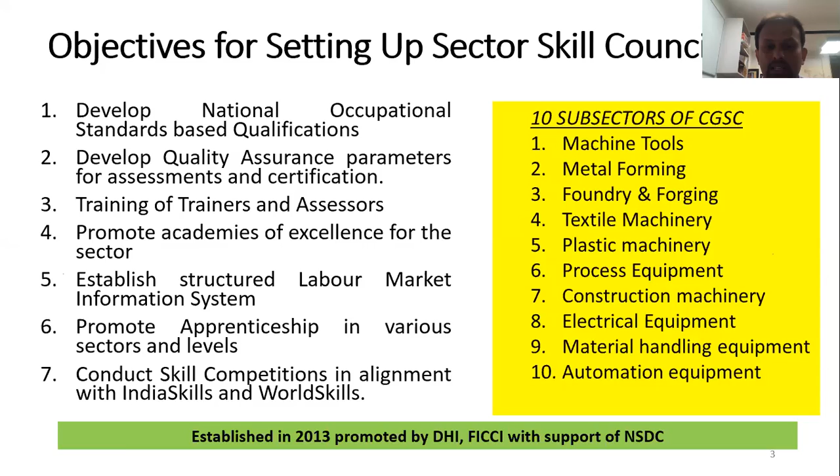CGSC so far has affiliated approximately 896 training centers pan India. We have developed 55 qualification packs and 96 unique national occupational standards. And at the moment, understanding that Industry 4.0 is going to be the need of the hour, 2 qualification packs for Industry 4.0 are already under industry validation.

We have tied up with many academic universities and colleges. We have also done state partnerships, MOUs with some very good states. We have designated 15 TOT centers and 10 designated centers of excellence. As far as training is concerned, we have got more than 1 lakh trainees assessed and certified. We have also certified more than 800 trainers and more than 463 assessors as on date.

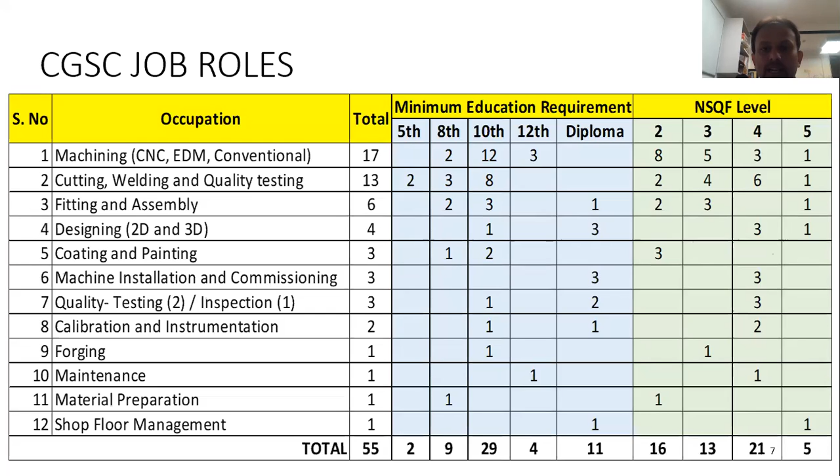Capital Goods Skill Council job roles are primarily in the occupations of machining, cutting, welding, quality testing, fitting, assembly, designing, whether it is 2D or 3D, coating, painting, machine installation and commissioning, quality testing plus inspection, calibration, instrumentation, forging, maintenance, material preparation, and shop floor management. In total, we have developed 55 qualification packs, and all these qualification packs have been developed keeping in view the industry's perspective, what exactly the industry's need is right now.

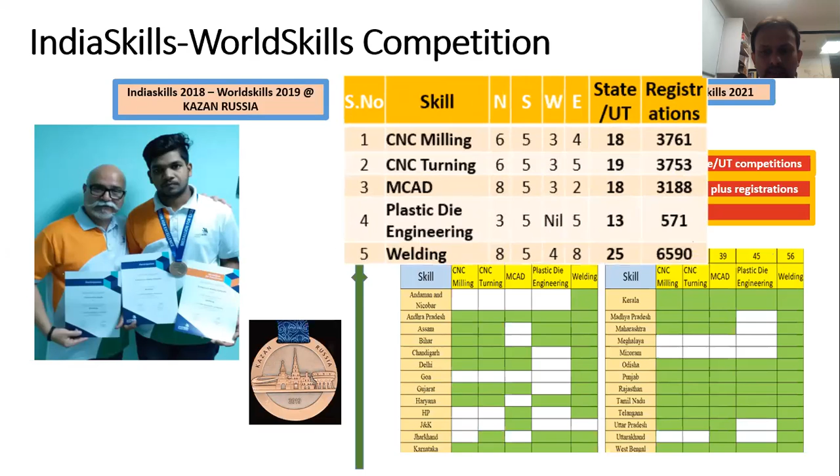We are also promoting apprenticeship, and the good thing about apprenticeship is that now no labor inspector is required to take care of the apprenticeship guidelines, because the CGSC CEO has been designated as a joint apprenticeship advisor for the office. We have created so far 4,945 opportunities and 1,052 contracts have been generated.

So in case your company is looking to hire apprentices under mechanical job roles, we request you to kindly get in touch with us. We will definitely help you in the hiring of apprentices.

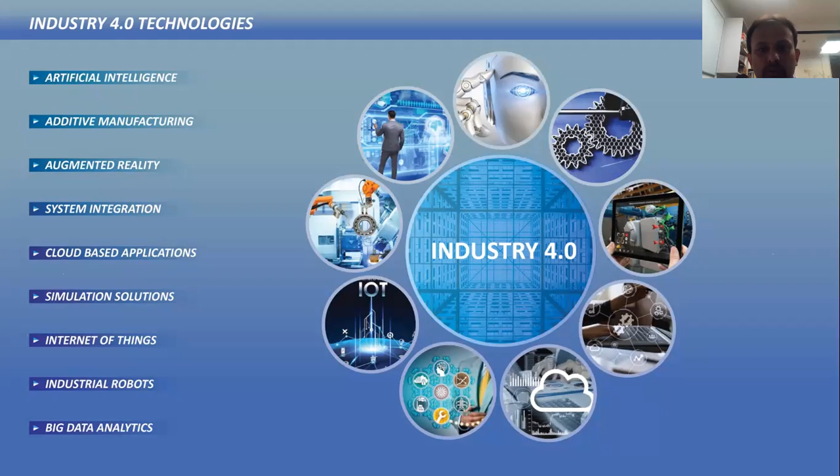These are a few of the job roles for the future, like factory automation engineer, smart mechatronics engineer, digital quality engineer. These are a few of the job roles which may be required in the coming stages by the industries.

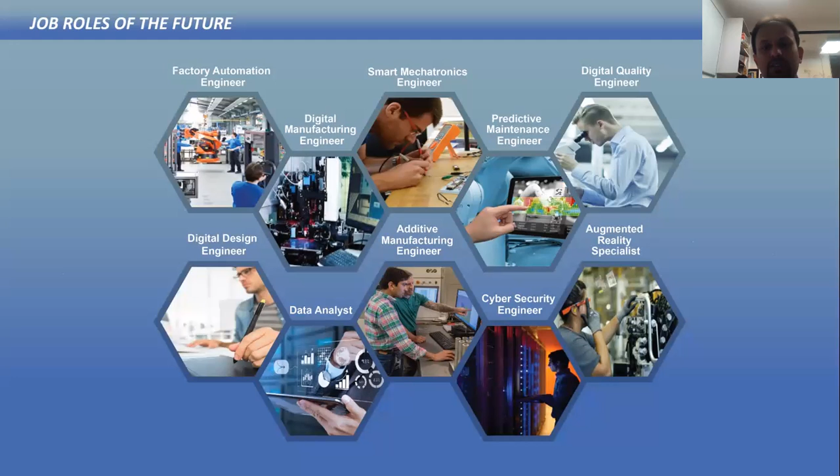Atmanirbhar skilled employer mapping. This is a portal which has recently been introduced by NSDC in association with sector skill councils. So the main objective of developing this particular portal is to bridge the demand and supply gap. So recently when the COVID was there, many of the industries have actually approached us and requested that, see, we are looking forward if you can please help us in hiring some good quality workforce.

So keeping this in view, the government has recently launched this particular portal, and Capital Goods Skill Council is also in a process of development of its own placement portal for the member companies, where the member companies can easily post their job requirements, and we will help them in getting the right quality certified workforce for their company.

As far as industry is concerned, we can support in providing the workforce. As I have already mentioned, we are also into upskilling and reskilling of existing employees through RPL and certify existing workforce through CGSC. We also provide an opportunity to explore industry-owned training centers and adopt existing centers under CSR initiatives. Knowledge support is always required from industry experts to run relevant need-based skill courses and be a member of CGSC.

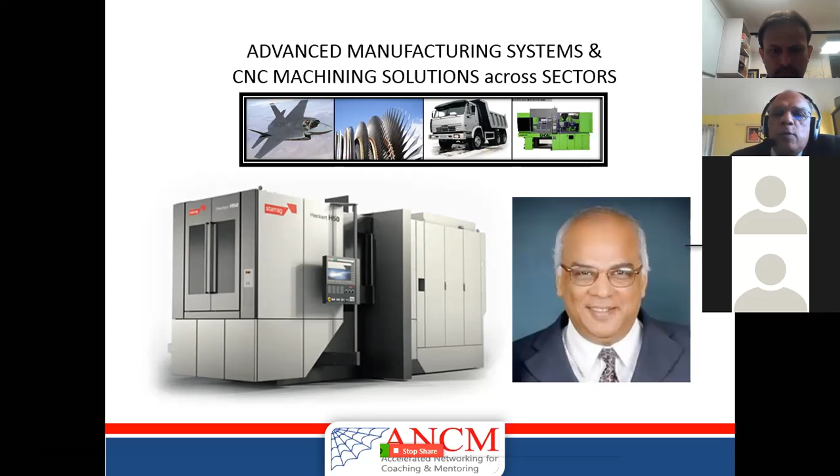Machine tools are used in several markets: typically aerospace sector, energy sector, power generation, industrial sector which includes machine tools, valves and so on and so forth, general engineering - industrial sector is nothing but general engineering - and transport sector. Transport sector means not only cars, it is 2-wheelers, 4-wheelers, which means passenger car, trucks, tractors.

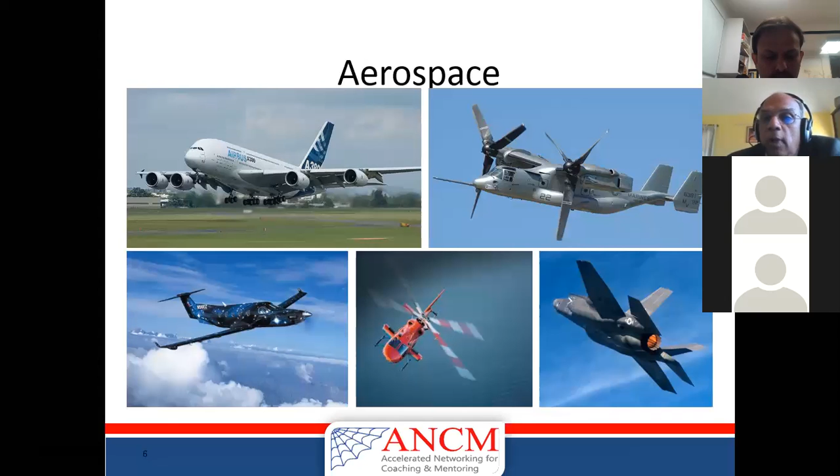Typical examples, I already told you. Transport could be tractors, trucks, even marine ships come under transport, and railway. Aerospace could be helicopters, drones, not only aircrafts - aircrafts could be civilian or military. Energy sector: power generation, turbines, windmills.

Now, the reason I want to go through this is the machining solutions. The word 'solution' is very important - we are not talking about a machine tool, engineering, design of machine tool and all, we are talking about solutions. That means the customer should be able to appreciate the requirement of the machine tool. The buyer of the machine is the one who is looking at the application of the machine and how the metal cutting happens. Today I am focusing on metal cutting machine tool.

Capital Goods Skill Council will invite experts from other sectors as we go along. We will get experts from metal forming machine tool, plastic injection machine tools, textile machinery, and so on and so forth. But today's focus is metal cutting machine tool.

The application of the customer for the component, whether it belongs to transport, power generation, aerospace, or industrial, is very important for us to understand. Then we can select the right machine for the right component.

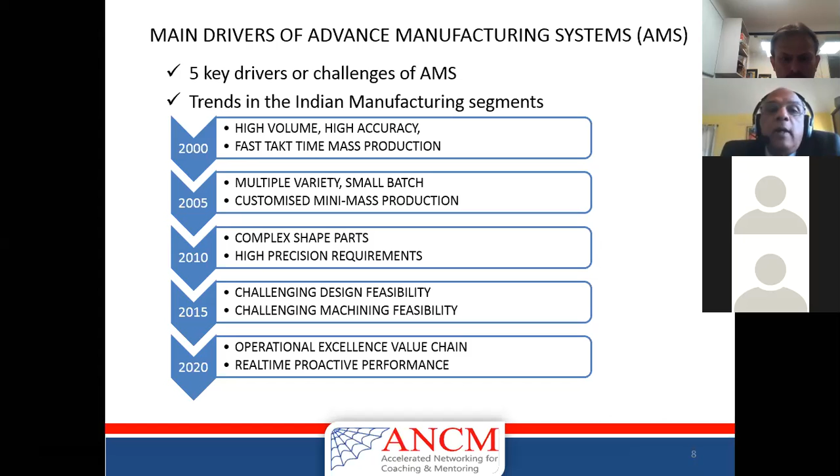Now let us move on to what is happening in the trend in the last 10 to 15 years, the trend in the industry. I'll come back to the slide after I explain the trend.

High volume, high accuracy, very low takt time. Takt time means the time required to produce one component when it comes out of a line. It is total time available divided by volume of components. It is different from cycle time. Cycle time is the time required to produce one component, the second component, the third component. Takt time is total time available divided by total number of components coming out of the line.

High volume, high accuracy, fast takt time, mass production—it was there till the year 2000. Till then, volume was 100,000 cars, 100,000 trucks, 1 million two-wheelers, that means 10 lakh two-wheelers. This is the kind of volume we were talking about. But now the scenario has changed. High volume mass production was before year 2000. From 2001 onwards, the last 20 years, the trend has changed.

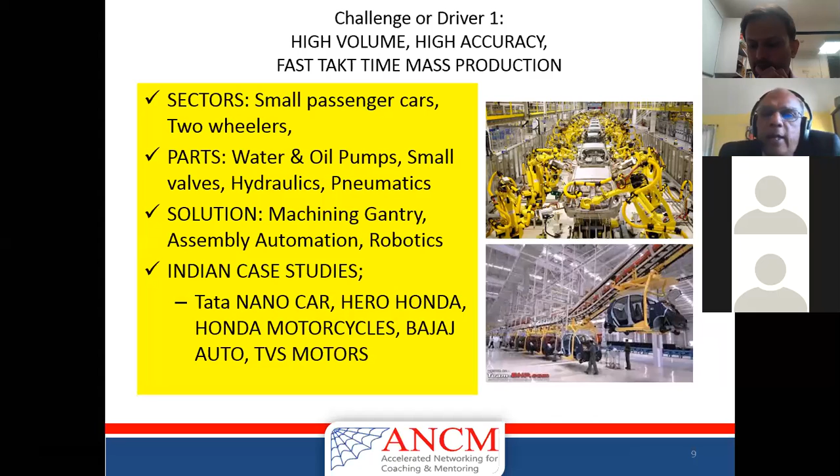In high volume production, gantry, robos, were very popular. The new trend is multiple variety—no one component is the same as another component.

There is batch production, which means mass production means very high volume, while batch production means small batches, 50 pieces, 100 pieces. Typically if you look at the aerospace industry, even the automobile industry is moving towards batch production. Valve industry, oil and gas industry, batch production. Machine tool industry, batch production. There are many industries which fall into the concept of batch production, but many variety.

Some of our machine tool players in India are producing 100 types of machine tools, and each machine tool has at least 10 machined parts. That means 100 into 10, 1,000 types of parts they are machining every day—our leaders in the industry in India. That means high volume mass production is only in some sectors, and that too before year 2000.

Now there is a concept of flexible manufacturing system. I will explain that later on, which is used for high volume, low volume, multiple variety, small batch production.

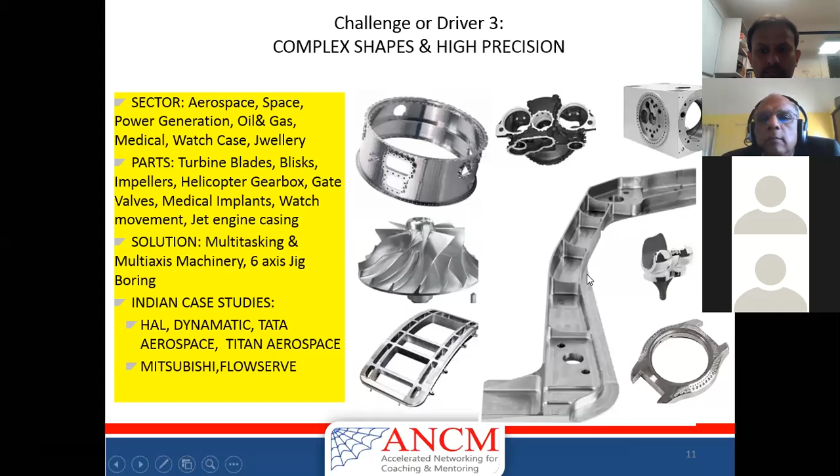And another factor which is emerging now is 3D printing, additive manufacturing. But why is it coming? It is a solution when the shape design itself is difficult—you can't make it with ordinary machining, called subtractive machining. It's not possible, or the shape is so complex, or you have to make it lightweight.

Or the design is not even conceived yet. It is not a conversion of regular machining to additive manufacturing—it is a new product itself, a new design. For example, a bionic design, a medical implant which goes into the surgery of a knee or shoulder, a jet engine casing in an aircraft. Several case studies—gyroscope, gyroscopic devices in avionics or in rockets. All this requires a new technology. The feasibility of designing and machining is changing.

Harsh, you started recording, correct?

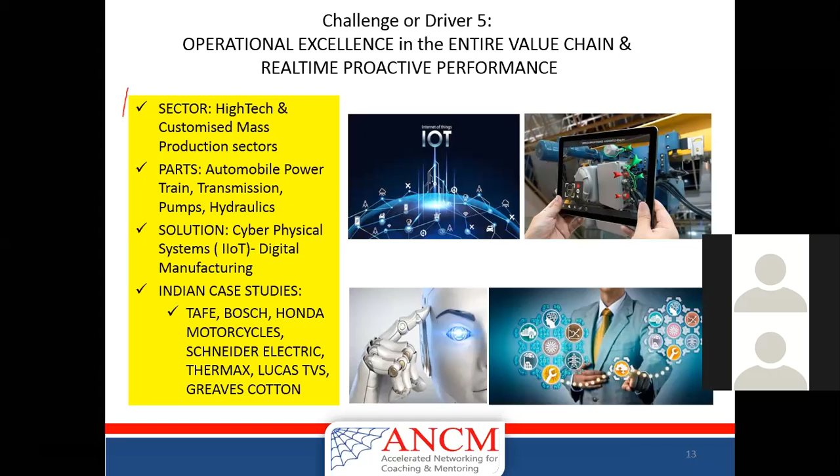Visibility: you can see the data on a real-time basis. Real-time means it is happening now, immediately you can see the information, not next day, not next week. The shop floor operator can see, the supervisor can see, the manager can see, and even the MD can see. So visibility, traceability, diagnosis - many reasons.

I think later on we can have a separate program on industrial IoT for machine tools. We will bring in experts like Mr. Sunil Jha for the program.

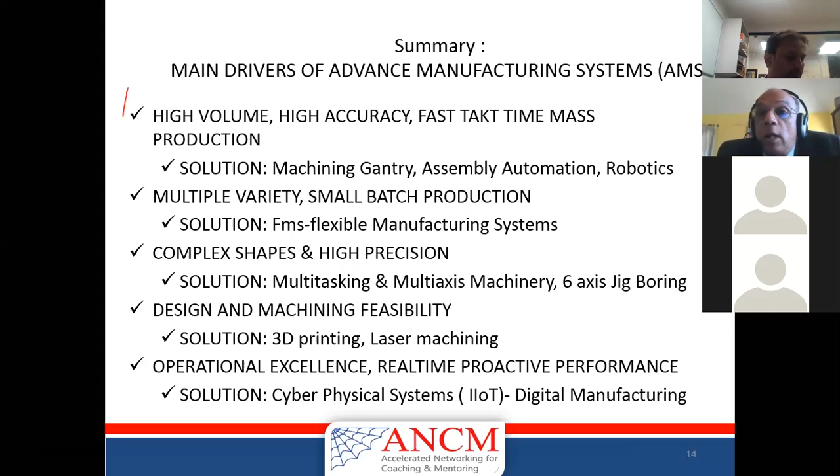So in other words, ladies and gentlemen, this is my first module completing. There are many reasons why machining solutions are changing in the last 20 years. High volume, high accuracy is not there anymore in many sectors. But even if some sectors are still requiring it, there are solutions: multiple varieties, small batch production, complex shapes and sizes, high precision, design and machining feasibility leading to additive manufacturing, and real-time proactive performance monitoring, which is called digital manufacturing.

So these are the reasons, and I come to the end of module 1. If anybody has put any questions in the text box, I can answer that. Mr. Harsh.

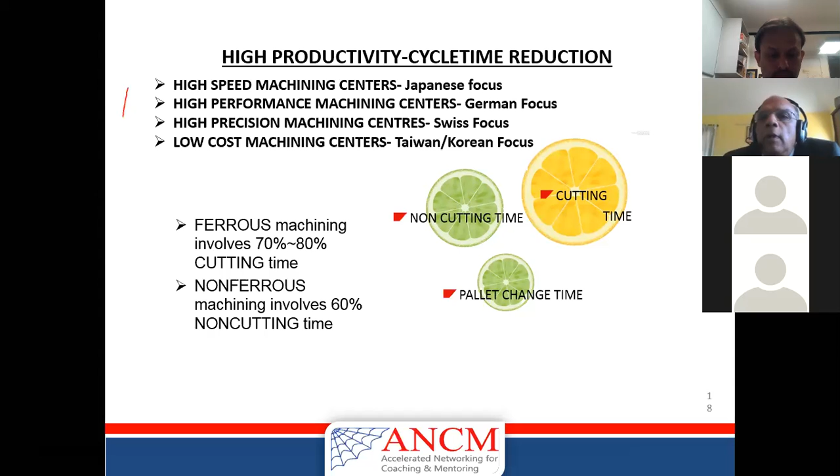So they focused on precision. So the high precision machining centers came from Swiss, SIP jig boring from Switzerland. The Taiwan, Korean, China, they were focusing on the cost of the machine. So what happened? They were looking at how do we minimize the cost. So different people had different objectives and different countries were focusing on different aspects. That is how the industry evolved over a period of time.

The next slide I am showing, see, we may not be able to cover all the slides, but if you understood something during this presentation, I am happy.

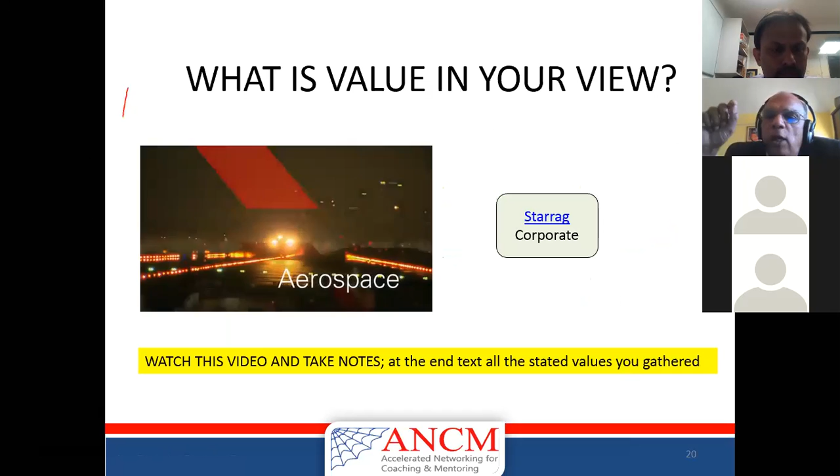Let us look at a small video, right? Harsh, you can tell me whether you are able to hear the video. Okay, sir. While you are seeing the video, I want you to make some notes as to what are the value parameters they are mentioning in this video. Harsh, you are able to hear the video? Sound? Yes, sir.

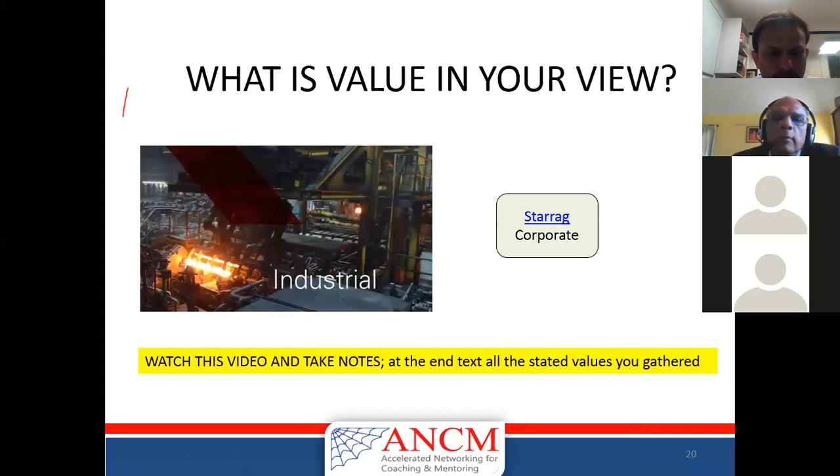The world is in a constant state of change and progress. Our world is made up of technical solutions that enable this progress. Regardless of the industry sector we are active in, your needs are the focus of everything we do. Profitability, safety, and growth. We help you to change the world.

I've just stopped for a second. The parameters of the value, all of you start typing on the text box. Some are spelled out in the video, running commentary, some are not told. You can type out whatever you feel like. I'm starting it again.

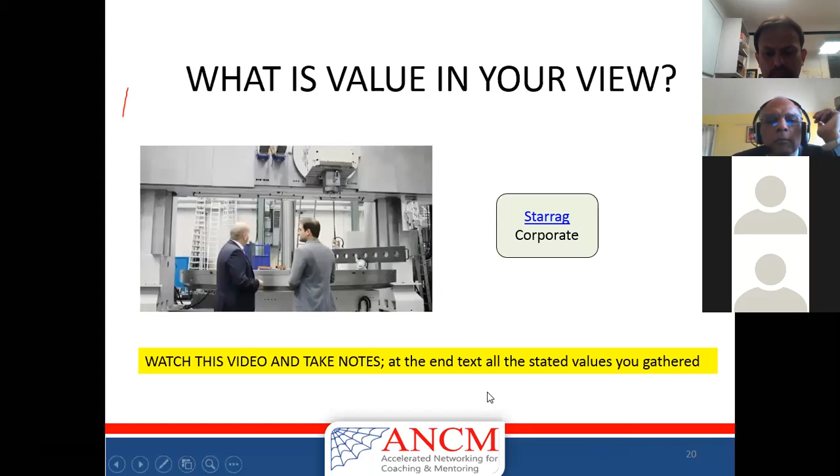How do we do this? That's very simple. We listen to you and ask the right questions. Talking with you about cost effectiveness, growth targets, and competitiveness. About ways to reduce your production costs and to increase efficiency. And how to simplify processes and maximize productive time. Developing optimum solutions tailored to your needs. We attach great importance to reducing processing costs and achieving shorter throughput times.

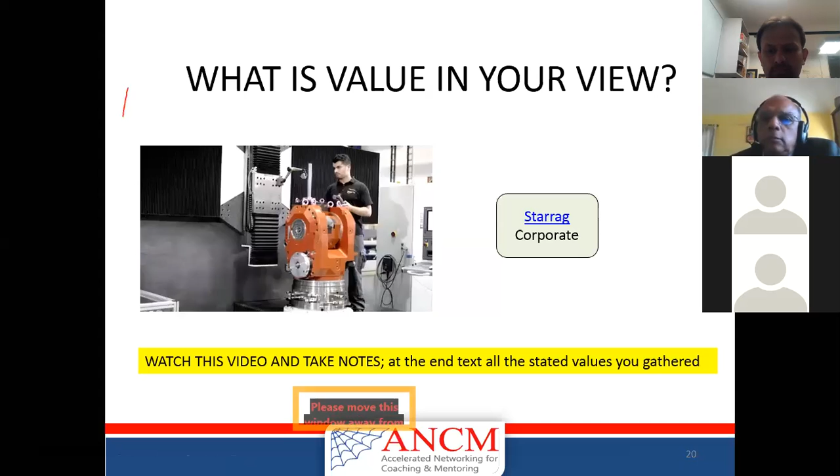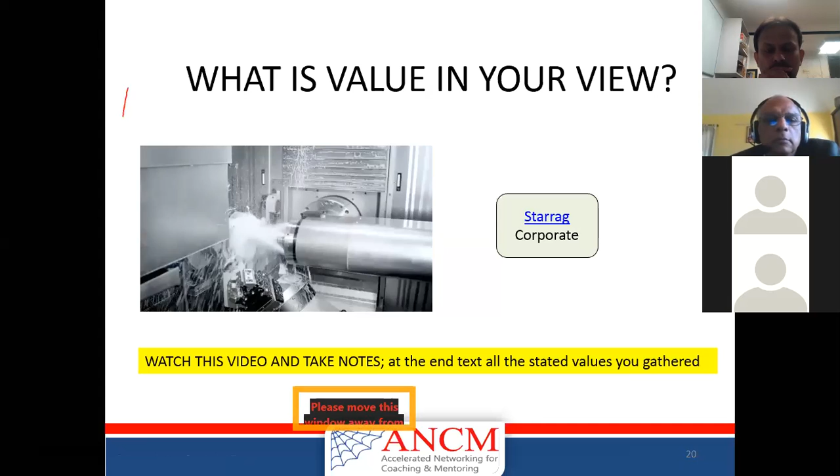Added security through improved delivery reliability, repeatable processes, and consistent production quality. And to increasing competitiveness by opening up new market segments. Creating measurable added value for you and contributing to your success. We help you to change the world. That is what we stand for. Engineering precisely what you value.

Very good. I'm not able to see the text box. So some of the values which I have received, keep on reading it. Just read it out very quickly. Productivity, competitiveness, reduce production cost, efficiency increase, develop optimum solutions, tailor-made customizations. Most of them are actually same. Cost effectiveness, simplify process, value from customer point of view. Again, the same thing, cost, reduce process cost, customizations. After some time, they stopped listening. They did not notice reliability, precision, and so many other parameters.

Okay, so there are many things in this video. The recording will be sent later on. You can analyze it at your home. It has got at least 25 things mentioned. In a different masterclass, I would have conducted a quiz on this, but in an online webinar, it's very difficult to do that. Let's move on to the next one.

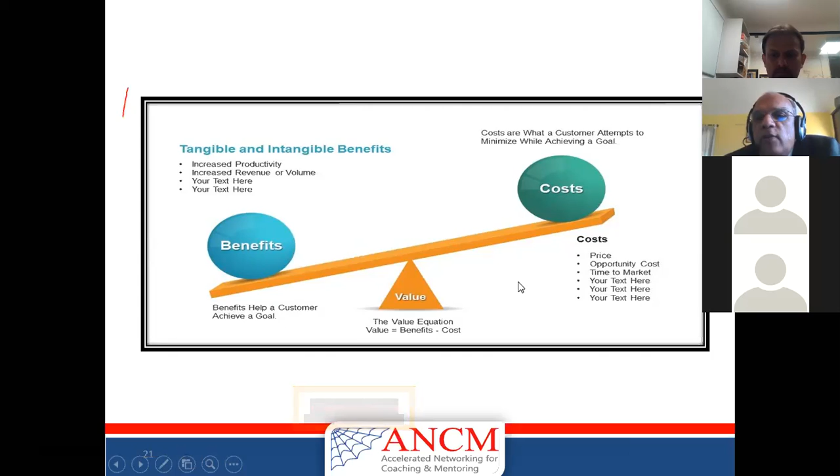Okay, Harsh. So most of the people have opted for high value, low price. And others? Anybody? Other than that? Only one change is there, which I can see. It says low value, high price. Okay. And then? That's all. Anybody? Any more coming? No, sir. Okay. See the ranking now.

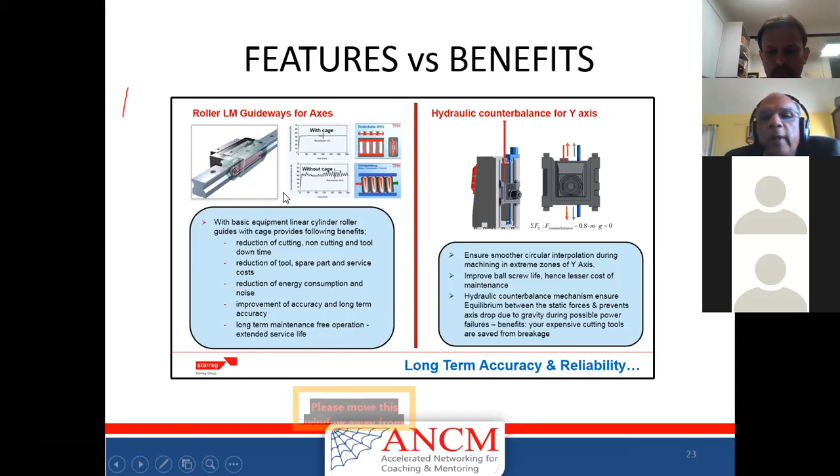Now, I want to move on to the next subject. Well, the previous subject I have written, how to understand value and communicate to customer. Geared spindle with high torque, roller LM guide, thermosymmetric construction, linear scales in all XYZ axis, counterbalancing for spindle, cooling of hydraulic oil to maintain viscosity. All of them have got many advantages. All of them got values and benefits. Well, I'll take only one example.

Roller LM guide, larger spindle bearings, wider span between LM guides. I think some of you are machine designers, some of you are machine manufacturers, some of you are maintenance people, some of you are sales and service people or customer application engineers. The rigidity in the machine design and construction is the advantage of this particular benefit. But the value and the benefit should be written as long-term accuracy, consistent quality delivered to the customer. So every machine element should be translated into advantage and translated into value and benefit.

Let us move on to a subject called product versus solution approach. In the beginning, I talked about advanced manufacturing solutions for multiple sectors. That is the title of my program. What is solution? You have a tractor. The tractor has got a gearbox, and the gearbox is machined by a machining center. Let's say in this case, horizontal machining center, and or a vertical machining center. I can have a rotary table. So a subsystem called a rotary table, using in a machining center, a gearbox with a special fixture is supplied to a tractor. In this value chain, what is called customer value chain, every step is very, very important.

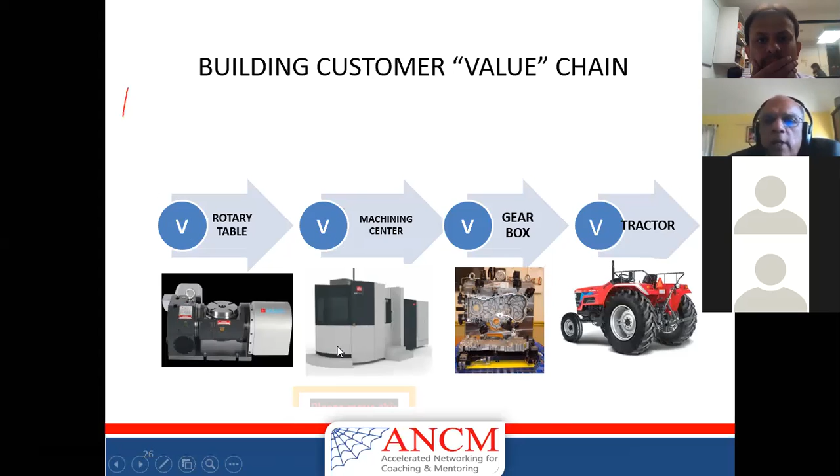The total solution is a machine tool plus the fixtures plus the cutting tools. That is represented in the next slide. Machine tool plus fixtures plus cutting tools make the customer happy. You can also add automation to that, robotics, gantry, Industry 4.0, etc. You may have a flexible manufacturing system, FMS system. All this put together is called a solution. Turnkey tooled up solution. I hope you are with me. I'll give some examples.

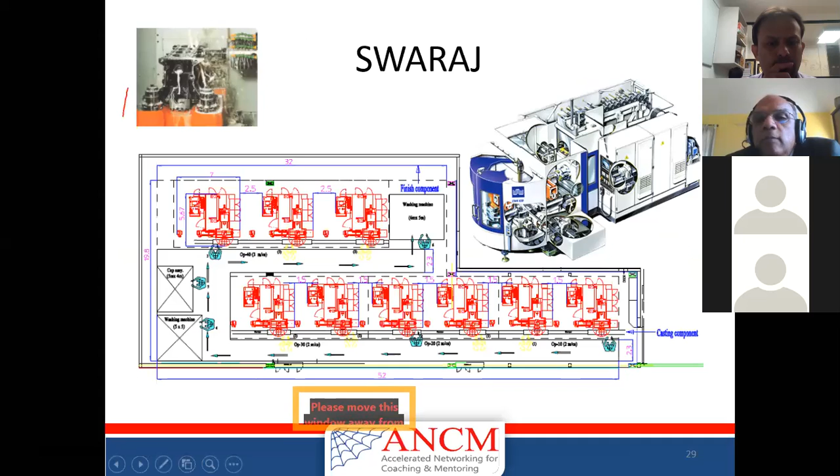Let's move on to the example. Swaraj Mahindra in Chandigarh purchased my machine. Not one machine, but 9 machines. But finally, when we delivered, the actual line had not 9 machines, only 7 machines. How are we able to achieve that? By a very, very clever way of doing fixturing and tooling. Cylinder block, cylinder head production in Swaraj Mahindra tractor production in Chandigarh. I don't want to get into the details of the technology, but suffice to say, when I give a machine along with fixtures and the appropriate tools.

The combination. See, it's not a technology seminar where I can explain all these things; it's like a webinar. The combination of fixtures and the FMS system gives you the benefit of what we call a turnkey solution.

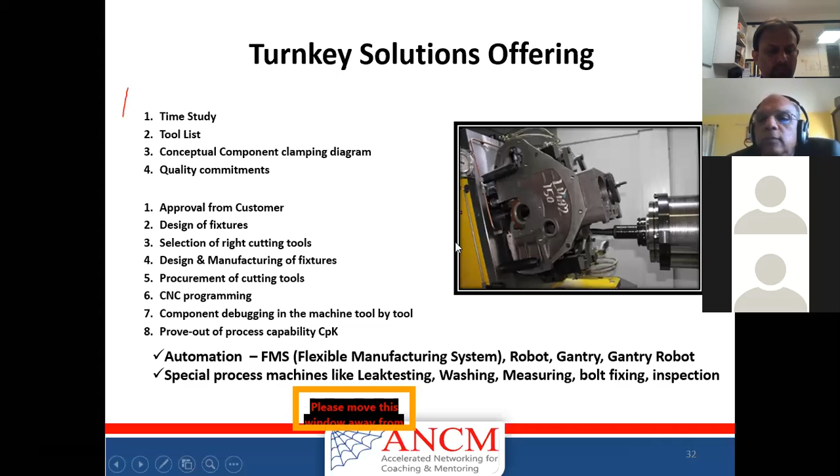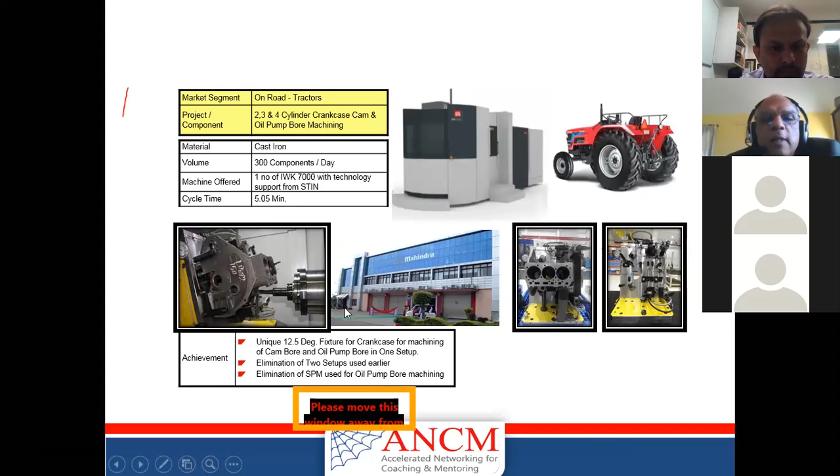Another example I already told you about, the inclined fixture and Swaraj Mahindra. But the main point is we could finally do 300 components per day. Cycle time was 5 minutes and there is no quality problem. I also mentioned we did it with 7 machines instead of 9 machines. In all these examples, the machine tool, the fixtures and the cutting tools put together give the total solution.

I was just trying to illustrate the concept of total solution, because the investment cost was also there in the quiz poll. Our investment cost was higher than the competition, but the customer still places the order with us. Why? Because the productivity, output per hour, and the cost per part is the lowest in the industry. Cost per part is calculated as machine cost, depreciation, tool cost, fixture cost, consumable cost, maintenance cost, energy cost, and estimated cost of downtime, because we gave a guarantee of uptime. Then cost per part is arrived at.

Another way of looking at it is total life cost. Over a period of 10 years: machine investment, turnkey cost, running cost, annual depreciation, residual value. Running cost means machine running cost, consumable cost, power, energy, coolant cost, cutting tool wear and tear, all put together. Annual depreciation: initial investment, final value. All this together, total life cost is calculated and compared with various competitors. Then the customer selects. So cost per part or total life cost are the two methodologies with which the customer evaluates our machine.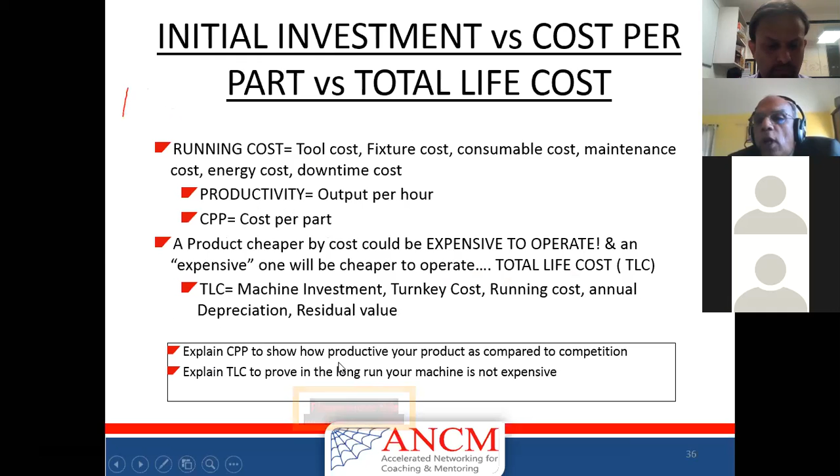What is the purpose? The purpose is to reduce the total running cost per part and the total life cost. So all these examples are finally leading not only to initial investment cost, but total life cost and total cost per part. That brings me to the end of module 2.

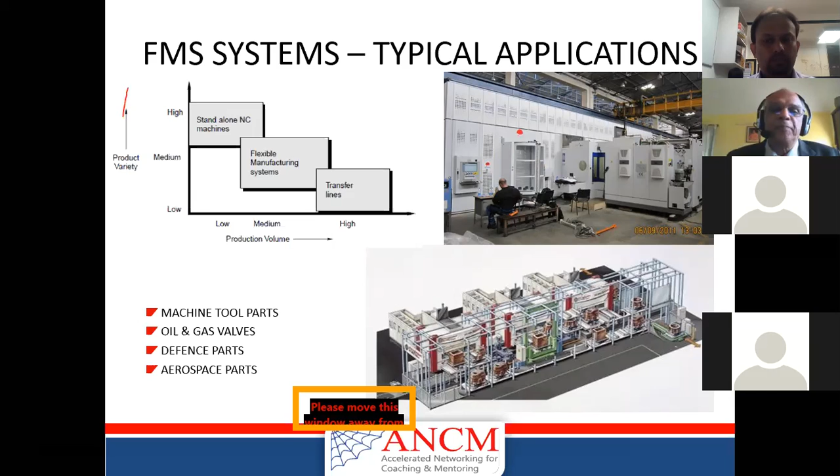But the two-wheeler industry is a different concept. The two-wheeler industry uses gantry robotic solutions, because the parts are small, the variety is still there, but the volume is very high, 10 lakhs. They're not talking about 1 lakh, they're talking about 10 lakhs. Coming to the tips on machining, that will be my program in the 3rd module. The tips cannot be generalized across the type of parts. I will explain why.

Value through unique machining applications, I call it, the 3rd module. The machine can be a compact machine. It may be addressing a complex shape. The machinability of the metallurgy may be very difficult, like Inconel, titanium, etc. Productivity may be very important. Large parts sometimes are becoming a big challenge: windmill industry, aerospace industry. Long-term accuracy is very important: jig boring, helicopter gearbox. Very high reliability is required in all the machines. Durability is slightly different from reliability.

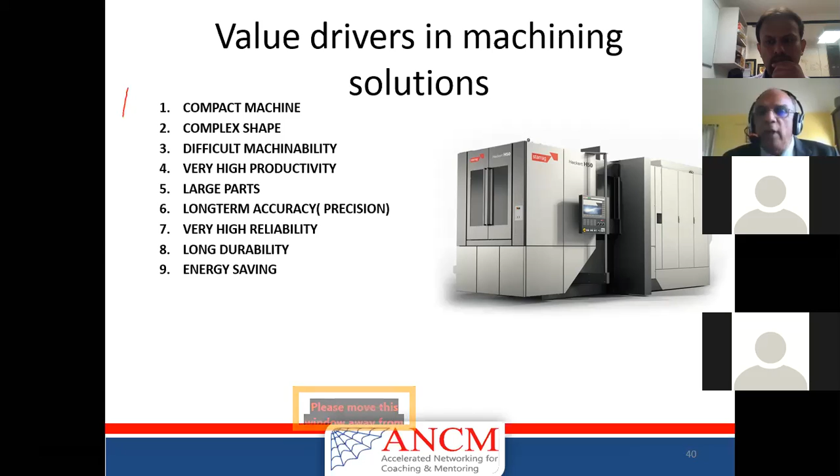Energy saving is becoming very important. Safety is extremely important. Complex application: multiple tasks on the same part, multiple parts in the same machine. And flexibility, I already mentioned variety of parts. And last but not the least, automation capability and intelligent machining. These many factors govern the choice of machining applications. Let us talk about one very interesting case study. I'll come back to this. Let us look at the complex machining.

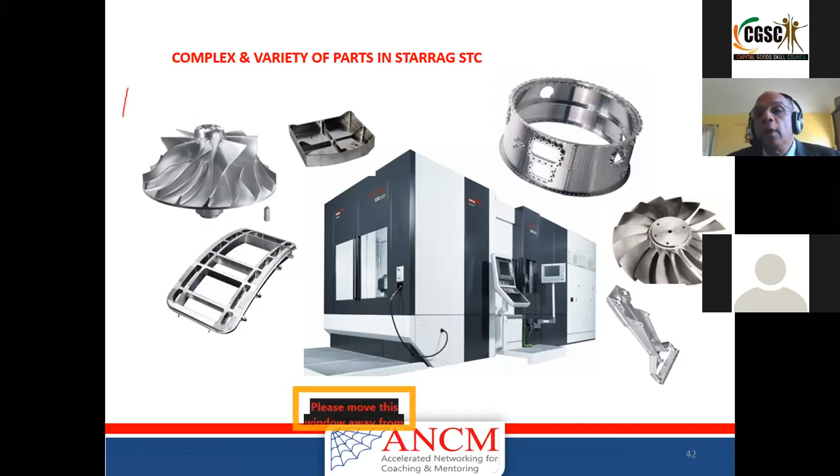Emergency door. 97% of the metal is removed in machining of an emergency door. The old method was consuming 34 hours to make one door. Today, it requires only 11 hours.

Milling strategy for blisk manufacturing. Blisks and impellers. I will show you a video now. There are broadly two methods of producing blisks. Both are 5-axis methods. Milled from solid block. 75% of the metal is removed. You can see that side is still not machined. This side is machined. It's a solid block. Another method is linear friction welding.

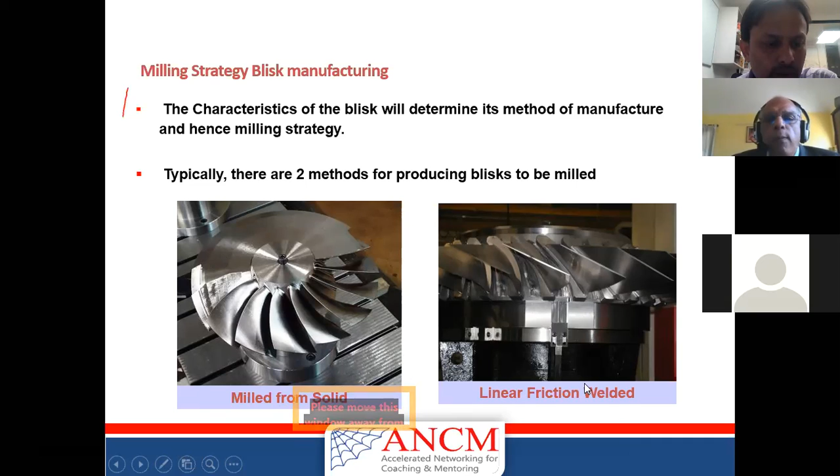Harsh, I'm getting one small window. I don't know whether it is from your computer. No, sir, this is not from my side. Okay. Yeah, it goes and comes back.

The cycle time reduction is very, very important. At the same time, the quality, particularly in these corners, the fillet radius, as we call it, in the corner, when the blade is attached to the shaft. Very, very important. Otherwise, it will crack. The aircraft will crash. Hundreds of people will lose their life. The surface finish of these surfaces is very, very important. By an optimized selection of cutters.

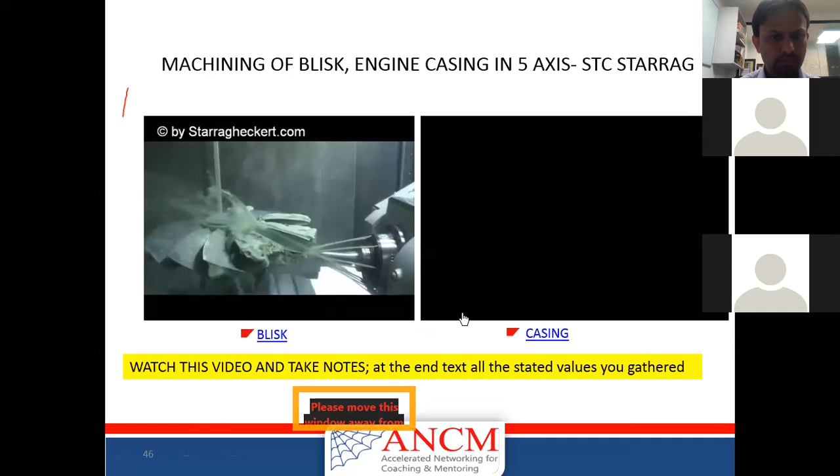I will now show some videos so people can appreciate what is happening here. So, in that video, between each blade, there is a special material liquefied and poured between the two blades, and it gets solidified. It's like a puff material. In refrigeration, people use puff. High density puff. In this case, it's a low density puff. And while the machining takes place, the puff material is removed. Rough machining is already over, then the puff is poured. Then you machine it.

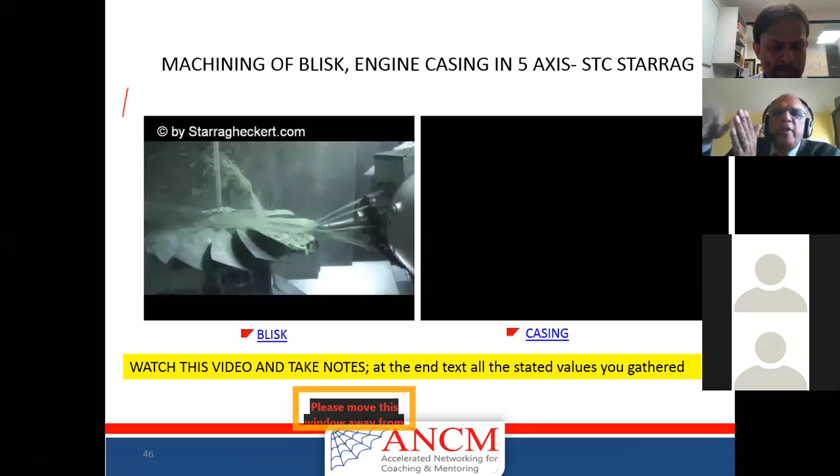The advantage is the two blades are kept without distortion by this puff material. While machining is going on, there should be no more distortion. And still the surface finish has to be achieved. And the fillet radius at the end has to be achieved. It's a 5-axis machining center.

Another example. MTD CNC, bringing you the latest engineering news via video media.

Now, Bernard, the Starrag STC 800. A big part of your business is casings. Could you tell us a little more about the casing market? Well, casing has always been one of our core competencies.

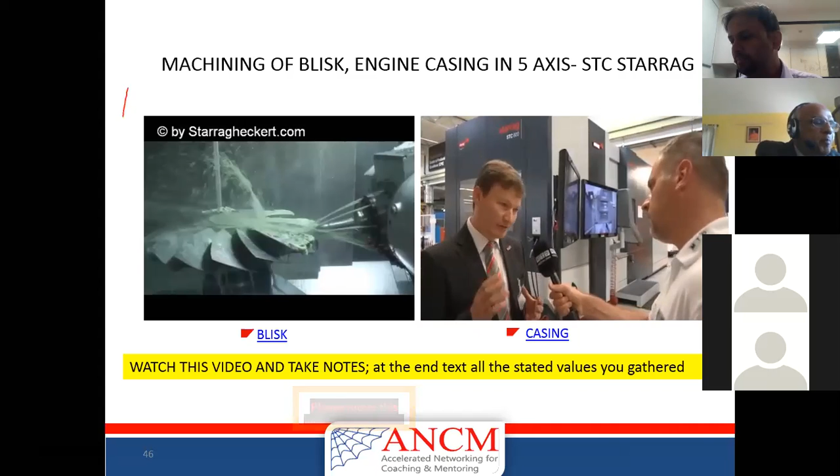For us, there are still distinct challenges in machining casings. First, we have challenging materials—titanium, nickel-based alloys, high accuracy requirements, and difficult access to certain features, especially on the inside. So it is our goal to have the most dedicated and advanced solution for our customer.

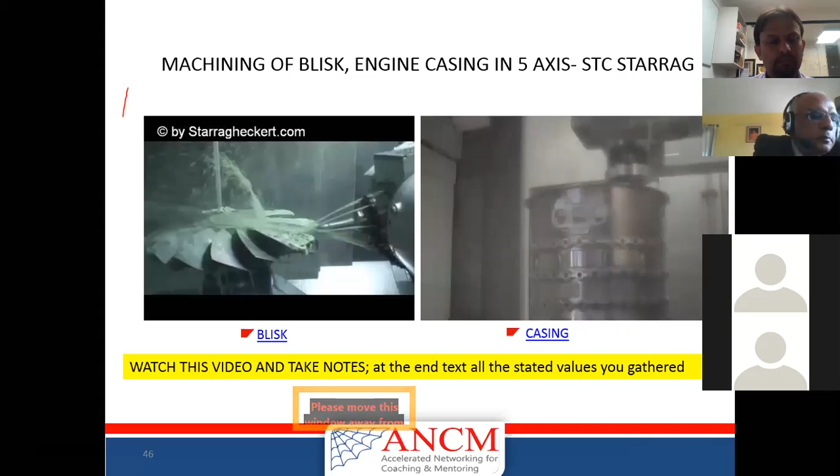This means we have to understand the process and everything around it, integrate milling and turning, and have competence in fixture design for milling flimsy sections of the part, as well as machining internal features like back chamfering using angle heads. We offer a solution with automated tool change into an angle head, so we can offer a complete package giving customers the competitive edge they need.

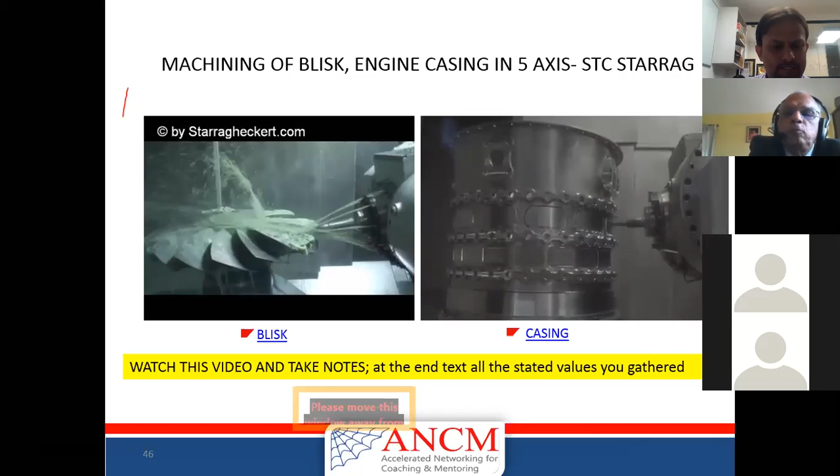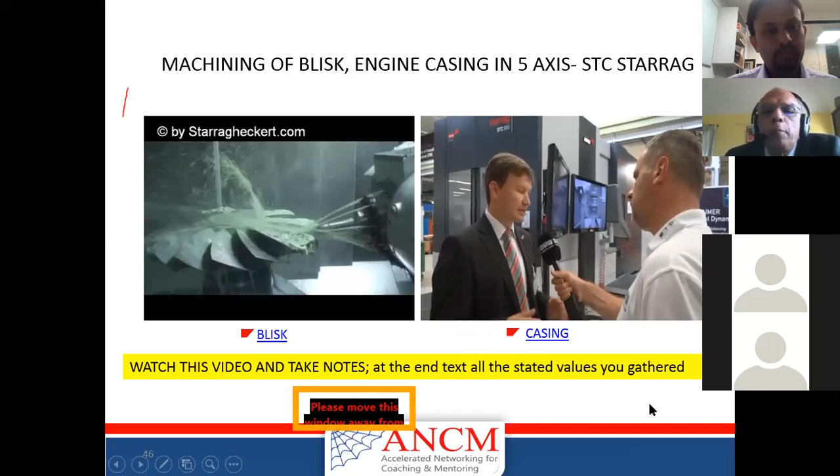There is a big challenge in what is called the MRO industry—maintenance, repairs and overhauling. Let's say an aircraft has landed and they find a problem in the engine. They want to repair the impeller or blisk going into the air compressor of a jet engine. How to repair it? The combination of additive manufacturing and adaptive machining. These two technologies are used to repair the existing blisk or impeller. This is done by a company called Toolroom Technology Limited from England.

So there are many concepts in machining solutions. Adaptive means based on the profile and the metallurgy, the tool path, feed and speed will vary. That is called adaptive machining. It's almost like Industry 4.0, but we did it 15-20 years back.

Another thing is additive manufacturing. Laser cladding is done and metal is deposited, then adaptive machining is used to arrive at the final part.

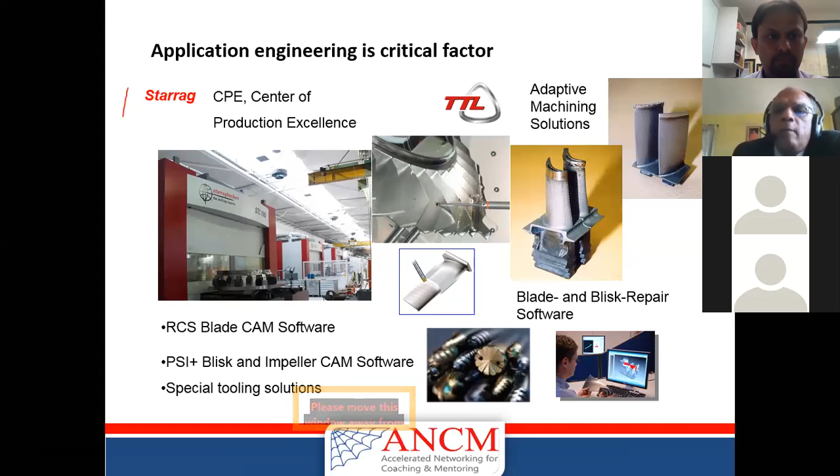And imagine, the surface finish of the blades is very important. It's a special purpose machine, SPM. Somebody asked about SPM—it was invented 60 years back, and until now it is very popular, perhaps the leader in the market in the world.

Doing all the single blades for steam turbines and gas turbines, starting with 100 millimeter long blades up to 4 meter, 4000 millimeter long blades can be machined by these kinds of machines.

Some blades are very complex—the blade has a fin like a fish. Some are titanium blades, very rigid, tough materials. Titaniums are very tough materials, right? And still I have to achieve a surface finish of N6. Surface finish is very important in all the blades.

Sometimes I have to machine the blade and the root of the blade together—the root is what goes into the turbine shaft. I have to do the root and the blade simultaneously, not separately. Old technology used separate machines for root and blade, but the quality was not achieved between the root and the blade. So the modern, advanced technology combines the blade and the root in one machine.

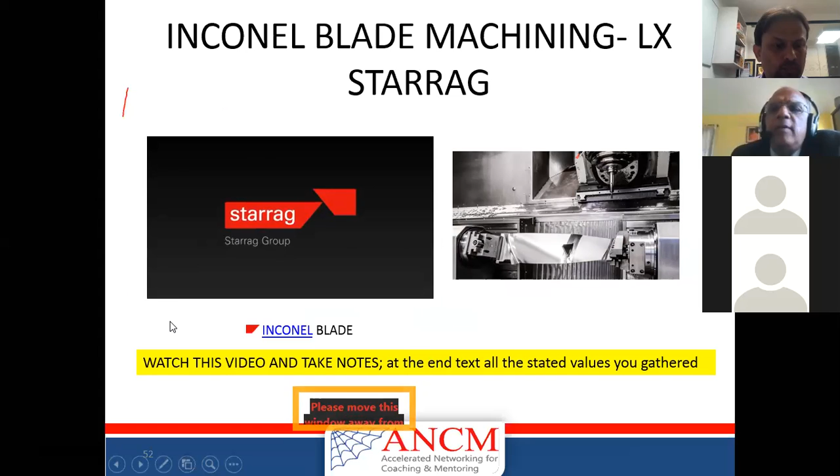Inconel blade machining. Look at how the noise of the machining is. Inconel is a very tough, nasty material. Look at the noise.

So here I gave the example of a tough material. Earlier it was complex shapes. Now I am talking about tough material. Now look at the next example.

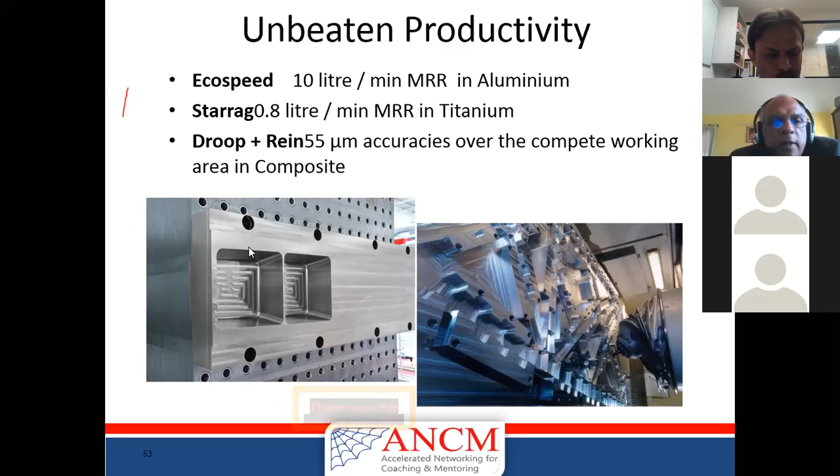Here it's aluminium, but a very large structure for an aircraft. Aircraft fuselage, imagine the length, runs into 20 meters, 30 meters like that. And here, aluminium has to be removed at 10 liters per minute, 10,000 cc per minute. And when the chips are going into the drum, it becomes 10 times that, meaning 100 liters per minute of chips in the scrap drum. How do we do this? And still quality is very important - the turning radius, all these are very important.

Starrag came out with a patented design called parallel kinematic spindle. I told you in the beginning, it is advanced machining solutions, not an ordinary machining solution like a lathe, milling, VMC, HMC - all gone. Now the whole world is moving towards advanced machining solutions for every sector. I will show you some more sectors, not only aerospace. This integral motor spindle is put inside what is called a parallel kinematic device, called a Sprint Z3. And such a large machine - you can see the video now.

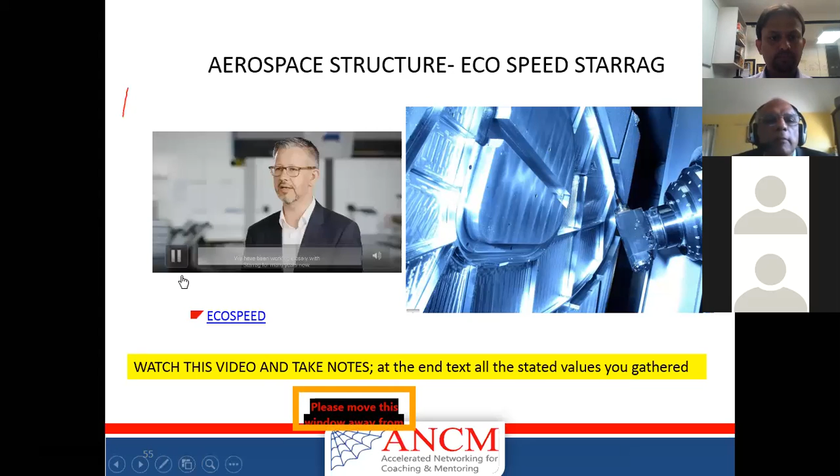Okay, because of time constraint, I'm not showing the full video. Very, very important point for today's webinar. I know at 1 o'clock we plan to stop, but if any of you have questions, I can take them up.

But before that, very, very important - the precision. When I do a helicopter gearbox, previously I showed you about productivity. Now I'm talking about accuracy, reliability, productivity - we talked about the values in the beginning. Entry level productivity precision is 7 micron, then less than 7 micron, then below 5 micron, and then below 2.5 micron.

Here we are not talking about the size accuracy, we are talking about positioning accuracy. What is positioning accuracy? Suppose I drill one hole, or bore one hole, or ream one hole, then I move to the next hole and drill, ream or bore. The hole-to-hole accuracy is called the positioning accuracy of the machine tool.

When the tool is picked up and put back, another tool is coming and put back, every time the accuracy is disturbed. Most of the machines made in India fall in this category, entry level. But as we go to Europe and Japan, it goes upward.

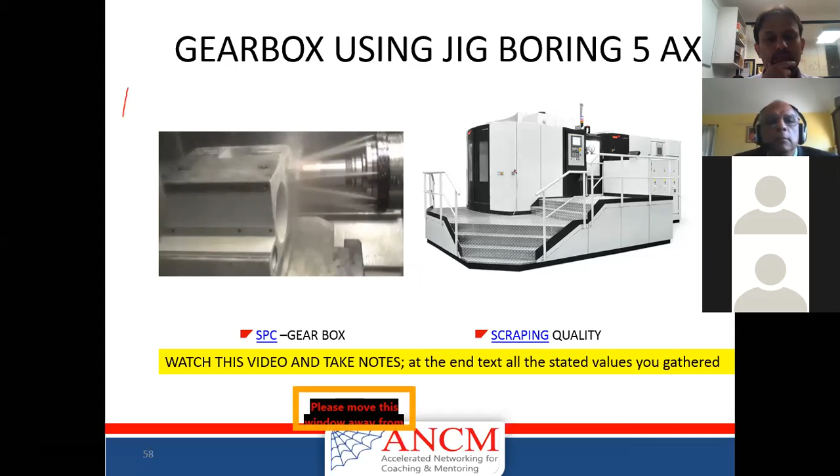There is a special machine which is a horizontal machining center with jig boring capability. Have a look at this video. It's a 5-axis machining center called SPC, Super Precision Machining Center. It is a jig boring machine, but designed as a horizontal machining center with a tool magazine. So it's a combination of a tool magazine, horizontal machining center, and jig boring. We call it super precision machining center.

This falls in the pyramid here between 3 micron and 5 micron. We have in HAL and in other companies like BHEL, BEML, ultra precision jig boring machines and super precision machining centers.

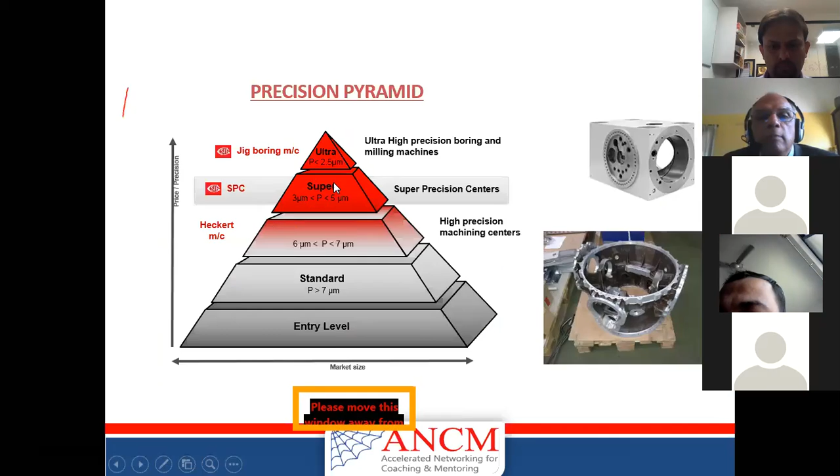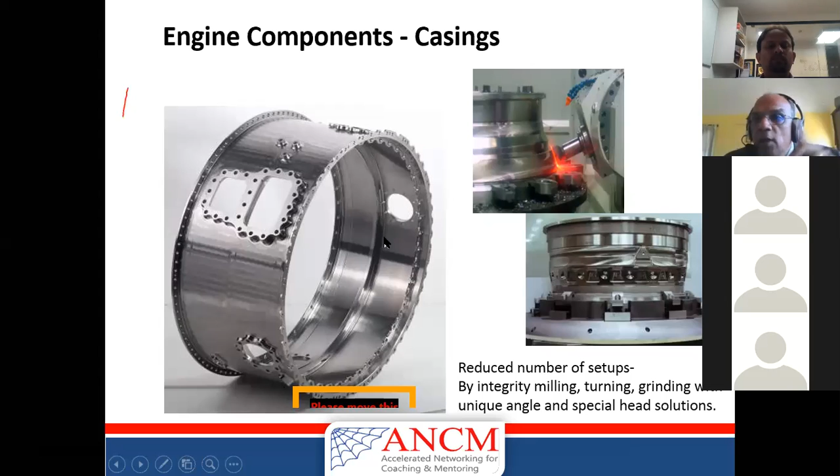We use a unique angle head and a special head to do the drilling of various holes. Positioning accuracy is 0.5 micron. 1 micron is 1/1000th of a millimeter, so 0.5 micron positioning accuracy between the holes. It's a jet engine casing, so when you fly an aircraft, you can imagine what the safety requirements are.

Then there is a special company in France called Berthiez. What they do is turning and grinding with a 2 spindle or single spindle machine, and they can do complete jet engine parts. They can also do housings of large bearings. I visited a company called FAG in Europe, they use these Berthiez machines, to machine a bearing of a windmill. Imagine the bearing of a windmill, the concentricity and axial runout is less than 2 micron.

Another example is the jewelry market, medical implants and jewelry. In those days jewelry making, even in Surat, they started buying these machines. They were making it with the old conventional method, investment casting. That's gone, now it's all done by machine. Why? You can design and launch a jewel within 2 days.

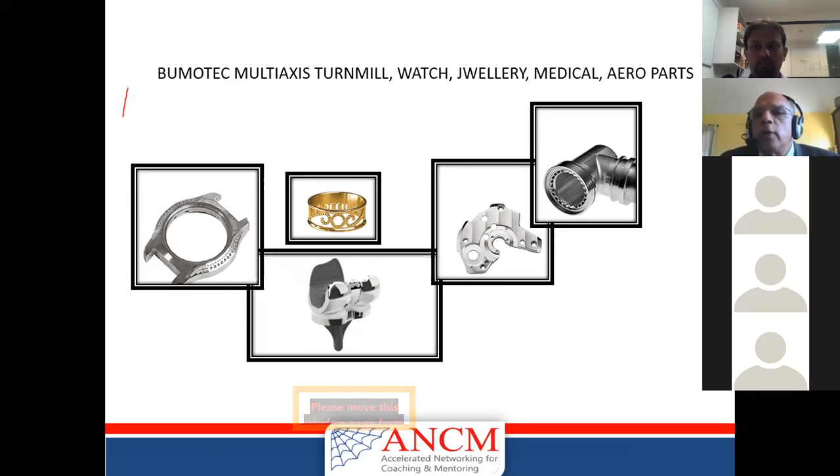Design, machine, launch the new jewelry in 2 days. Old method, design to launch was 3 months. Titan, Tanishq, a big company, A1 Jewelers, Emerald Jewelers in Coimbatore, companies in Surat, all moved to this concept. One small video for you, it is done by a special purpose machine called Bumotec, made in Switzerland. The machine can do watch parts, jewelry parts, aircraft jet engine nozzles, and also medical parts.

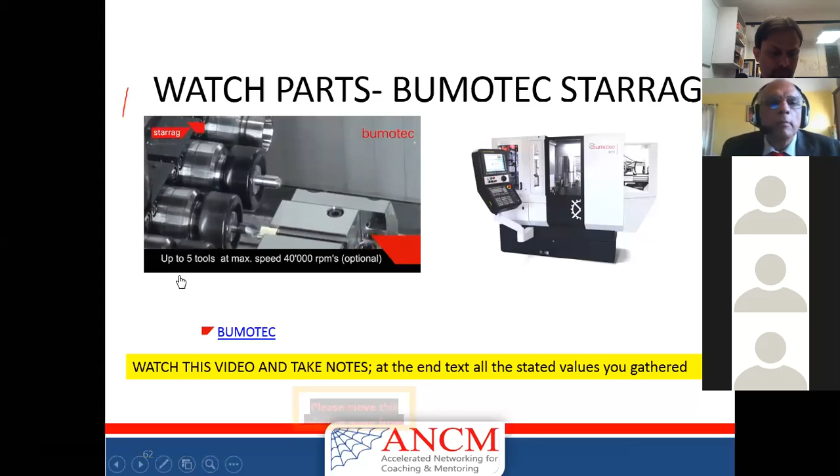I showed you this video, see the number of operations performed on the component by a single machine, several operations are performed. In the slide it was showing which operations, 7 operations. We can talk about it in another webinar, but these are special purpose machines producing mass production of watches, jewelries, medical implants, jet engine nozzles, and so on and so forth.

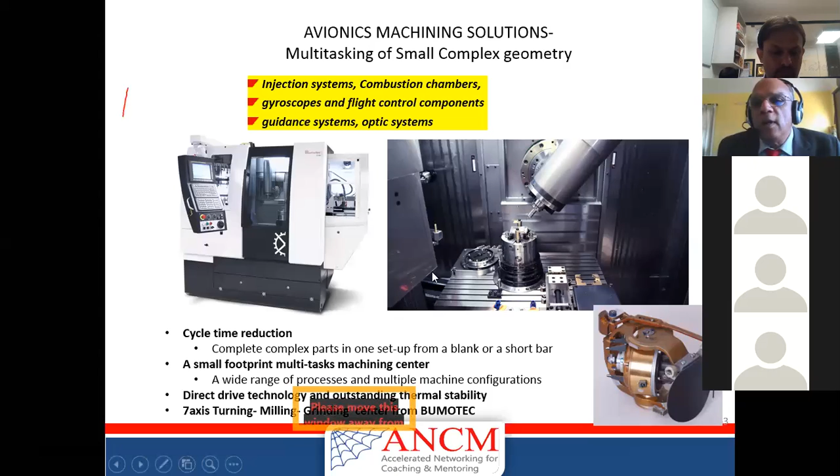It has got 7 axes. And avionics, I forgot to mention, avionics, gyroscope, 7 axis machining center from a company called Bumotec. Cycle time is the lowest, cost per part - initial investment is 3 crore, 4 crore, 5 crore like that, but cost per part, total life cost, is the lowest in this category. Companies like Titan Coimbatore, Emerald Surat, many companies already use these machines. In addition, some defense industries use this for gyroscope and other applications, and aerospace also, rocket, ISRO.

Additive manufacturing, a separate webinar we will have. Harsh will make a note. But suffice to tell you, complex shapes and complex designs cannot be made by metal cutting. You need metal adding. Metal cutting is subtractive, metal adding is additive. 3D printing.

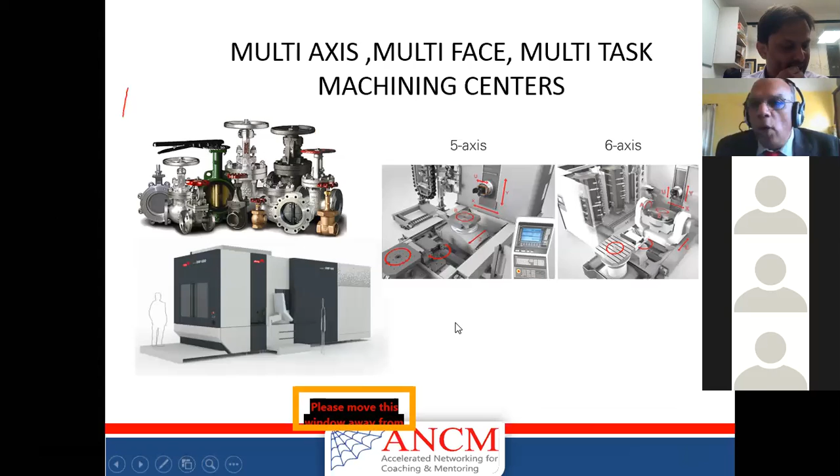And because of time constraint, I'm moving on to another sector, valve machining. Valves, you see the valves, oil and gas, water, hydraulics. They use a special head. This one head can do turning, drilling, milling operations. That too with a very high torque, 1700 Newton meter torque. Unique head technology, spindle technology.

It has got separate radial movement and also axial movement. We call it U axis and W axis. You know about XYZ axis and A, B axis. Now U axis, W axis. Through coolant supply. Let's look at one video here.

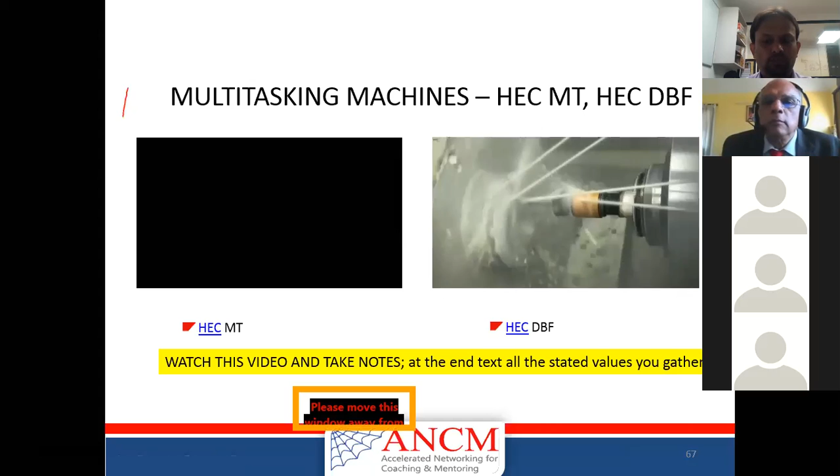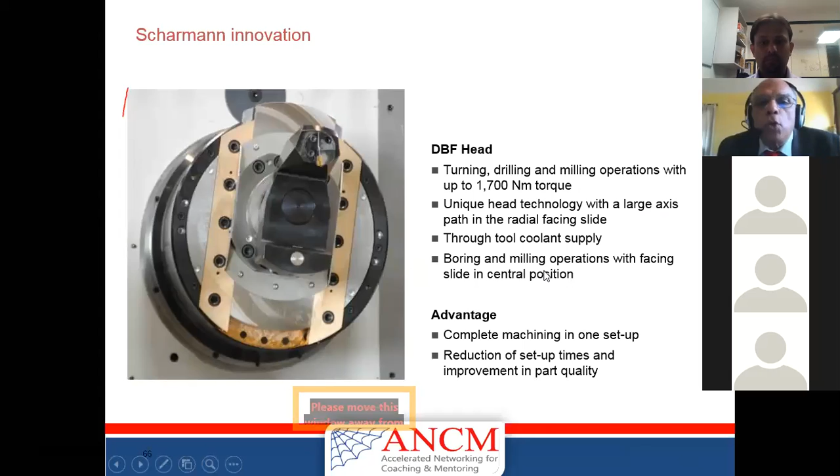But DBF is basically turning, drilling and milling, including external operation, which is very, very important. And that operation you saw in the video, and many milling and drilling, complete to make a valve, this kind of valves. So in advanced application, then multitasking. Multitasking means turning, drilling, boring, milling, everything is combined. There is one more video, but due to time, I am not showing that.

Windmill industry, maybe the last but one application. Several machines are running in Coimbatore and in Chennai. There are 24 machines of our company running in this thing. I am not showing this because it is produced by a Starrag company.

I am showing it for you to understand for every sector, what is the advanced machining solution per sector available in the market. My purpose is not to sell that Starrag brand. No. That's why nowhere you will see the word Starrag appearing here. But to show you the application, what is available in the market. There are other people also.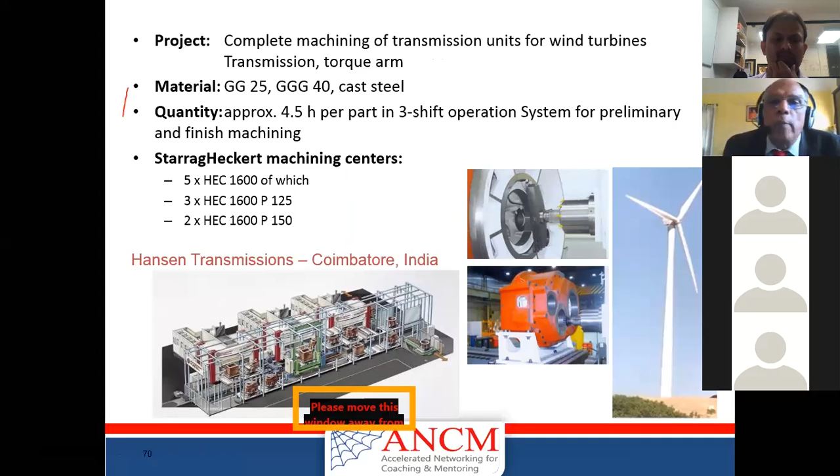Look at the size of the machine. Yeah. And such a large machine. Okay, this is one of the smaller gearboxes. There is a bigger machine, HEC 3500, 5500. This is a pallet size, 5.5 meter pallet size. And the boring is done by a very special concept.

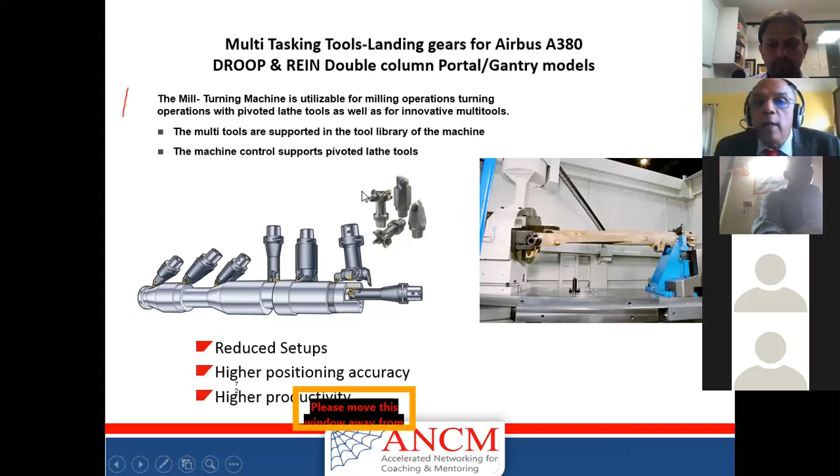Another example, landing gear of an aircraft. Landing gear. Many operations are done simultaneously or one after another. But the landing gear is not moved. It is kept without changing setup. It is the same fixture. Same fixture. And it is mounted and machined by a company called Droop and Rein or Mitsubishi.

All these companies are making what is called double column machines. Gantry or Portal double column machines. Multiple tasking and multiple tools are used to make a landing gear.

This is how even inside the machine, there is a universal spindle. Universal spindle, it is even better than a 5-axis spindle. It can go for 270 degrees, spherical movement. To do very large parts of a landing gear, aircraft structure, turbine structures, steam turbine, shafts, etc. And also composite machining.

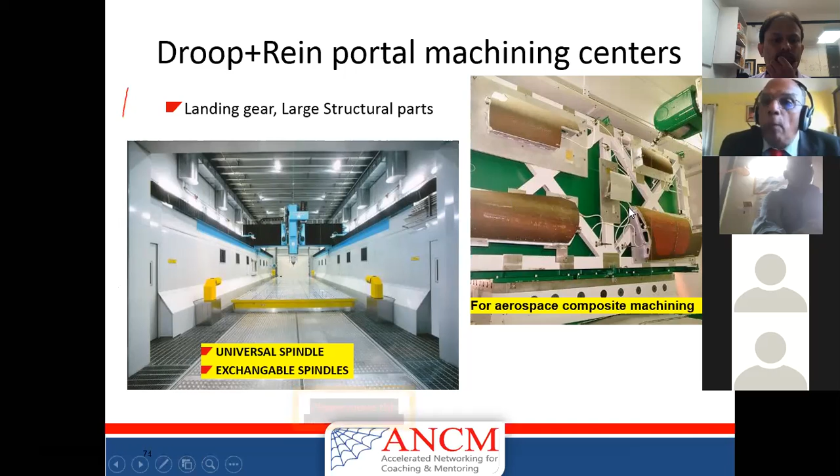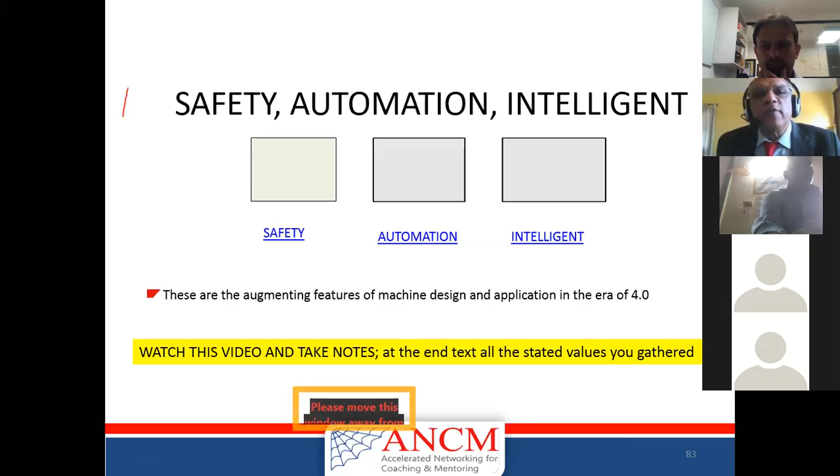Already explained to you FMS system. There are nice videos, but due to time, I will not go into that. Safety, automation, intelligence. When we do the Industry 4.0 webinar, I will cover safety, automation, intelligence, and also the FMS system. That is my promise to you. When we do the Industry 4.0 session, we will cover FMS system video, safety video, automation video, intelligence video, and energy saving videos. So I will stop here.

To summarize, sectors like aerospace, power generation, oil, natural gas, transport, industrial, watches, jewelry, medical, micro mechanics, very small parts. Everything requires a different solution. But the common feature across the solutions is a machine tool which can cover more than one application. If a machine tool can cover more than one application, it is good for the customer because the market is uncertain. COVID has come, my industry is suffering. One of your participants told us.

Yeah, I can take that question now. Harsh, you can come to the Q&A. Thank you very much, sir. You can take up that question on COVID to begin with. Then we'll go to the other questions.

Okay, sir. Somebody asked a question, what do we do in COVID? So basically, the question was how to overcome the present scenario, which was impacted by COVID-19, as far as productivity is concerned. You see, COVID has created many problems. One problem is people availability, skilled people availability. Second problem is the demand of the customer is fluctuating. Third problem is the supply from the supplier is fluctuating. First problem is resources, people. People supply is fluctuating.

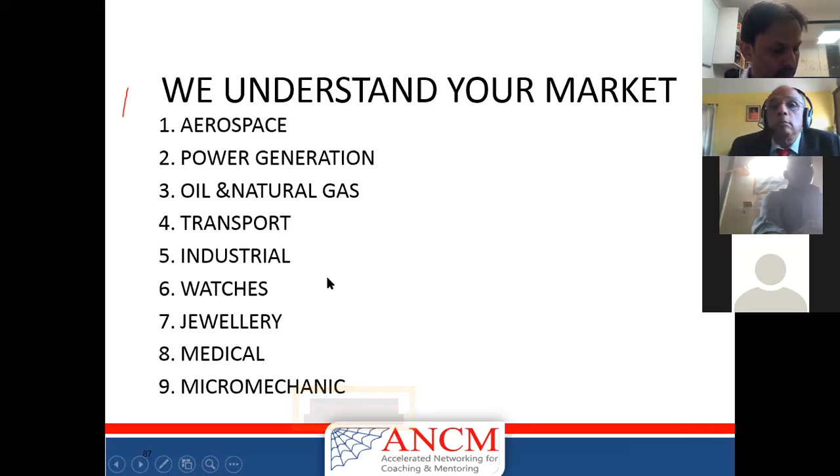Sir, as we are talking about Atmanirbhar Bharat, what are the hurdles in India becoming cost competitive in manufacturing? The Indian market hurdles are unique to India. Whether it is Atmanirbhar Bharat or otherwise, our economy suffers from two major issues: infrastructure issues, which cause logistics problems, transport problems, and our laws, our regulatory requirements. Labor law, taxation law, regulatory requirements.

Even other democratic countries, nearby countries, have addressed these two problems. Infrastructure problem, look at Malaysia, Singapore, China. They don't have any infrastructure problem. Their regulatory requirements are very flexible. People are more happy there. This is even before Corona.